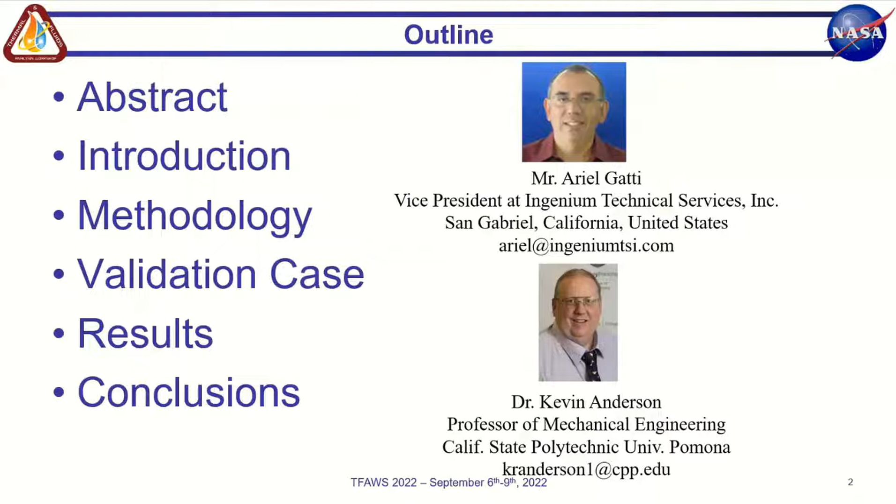So this paper really will talk about the ability to use Excel as a thermal analysis tool. Now, the ETA, Excel Thermal Analyzer, is self-contained within Excel. It's written in Visual Basic as a macro. ETA really takes advantage of mature spacecraft designs, although you could also actually build something from scratch if you wanted to. But it quickly gives you an answer to your thermal network in a matter of minutes, typically.

So this paper will present the methodology used. This particular tool has been validated. It was written, I dare say, about 20 years ago, and it's been used extensively in those 2 decades. The nice thing about this particular tool is that you can easily do a 1, 2, 3 noder problem, or you can basically do a problem that has thousands of nodes and tens of thousands of conductors. The only limit that it has is the number of rows in Excel. And last time I checked, you can get like 1 million rows. So you can have that many nodes and conductors. So that's the beauty of it.

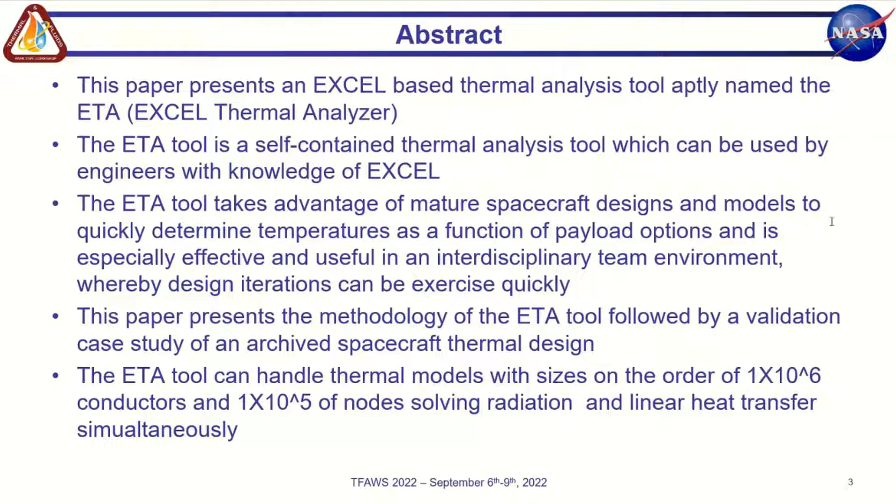Thermal Excel is not meant to compete with Thermal Desktop or ESATAN or any of the major providers. That is not its task. Its task is to give the thermal engineer the ability to do quick and dirty calculations. This is the thermal interface, and it's very simple. You provide a node range, a conductor range, and a heat, and you're able to do steady state, and it gives the thermal engineer the ability to do things that thermal engineers usually need to do. You can look at a heat map, QMAP. You can prune certain conductors by providing a node factor. So if you want to kill a conductor, you can kill it. So you can do many things that thermal engineers can do, and you can do that all within Excel.

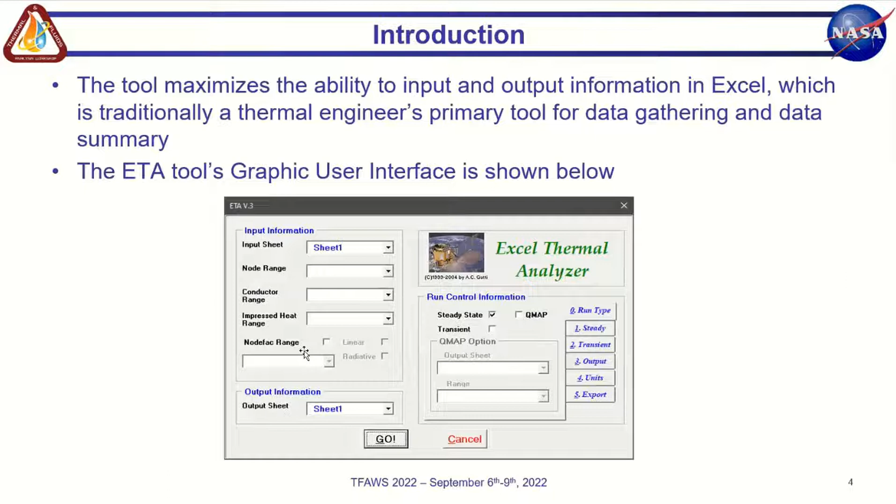So the methodology is based on a fundamental paper that was written by Ishimoto and Fink in 1971. They were with TRW, which is now Northrop Grumman, but it was sponsored by NASA. So the methodology has been around for quite a while, and it just basically follows a steady state heat balance equation for all the nodes, and it's very simplistic. The equation is given there, and the ETA tool basically iterates in a steady state both to a temperature criteria and a heat balance criteria. So, we don't want to violate the first law of thermodynamics.

So it does the very basic things that any tool will do, whether you're using a high-end tool like Thermal Desktop or ESATAN, or as we just saw earlier, Maya heat transfer technologies. Those are the high-end tools. This little tool provides the same level of accuracy as the higher end tools. However, it's not able to do the things that those higher end tools can do.

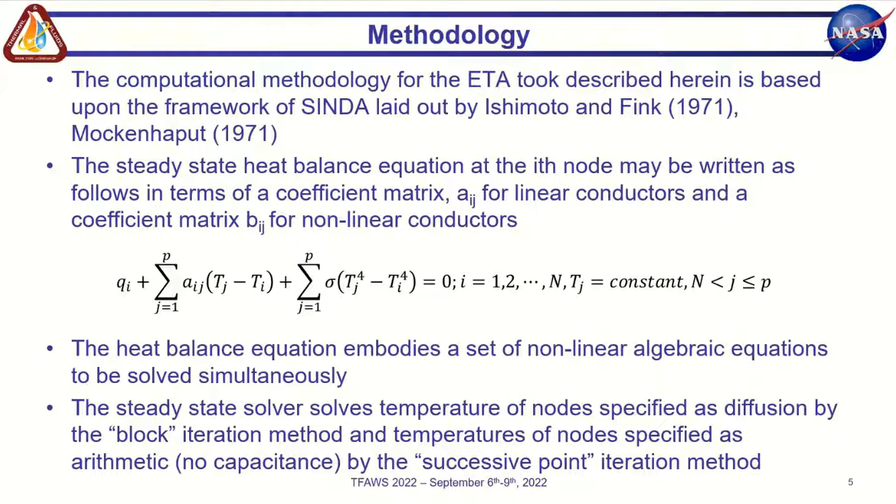There we go. At the heart of the tool, we use the pseudo compute sequence, or in the case of ETA, the long pseudo compute sequence, or LPCS. SINDA, for example, uses the same methodology, and it just identifies the position value of all off-diagonal elements, and basically it optimizes the matrix. So the same methodology is used at least in SINDA with an S, and actually CINDA with a C for those old guys out there. It's the same methodology. I'm not exactly sure what ESATAN or Maya will use, but SINDA will use LPCS, and that's the heart of the analyzer, both for SINDA and for ETA.

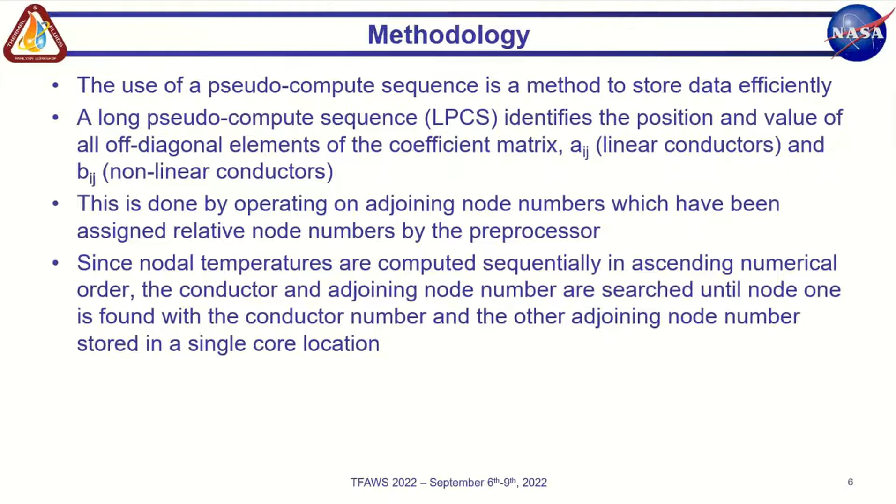Diffusion nodes, and very much like arithmetic nodes, it's the same. This is the equation that we're solving. So basically, the set of differential equations are solved numerically, and they basically result in this equation. So having a temperature, we will calculate the temperature for the next iteration, and so forth, until the change in temperatures meets a certain error criteria. And then we also check for the energy balance. So stability in temperature and stability in heat.

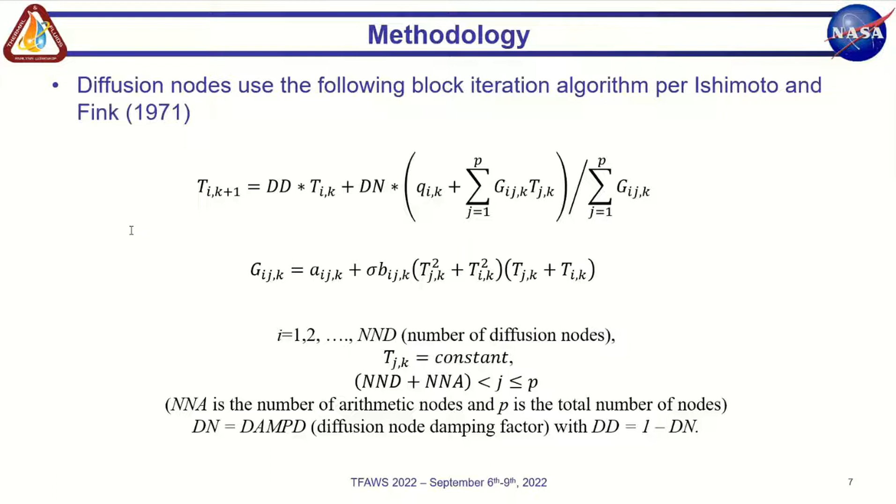And a similar thing is done for arithmetic nodes. Now, the issue with arithmetic nodes is the fact that they have no mass. So it makes it interesting to do a transient solution. But there is a solution. So they're treated in a similar fashion as they are diffuse.

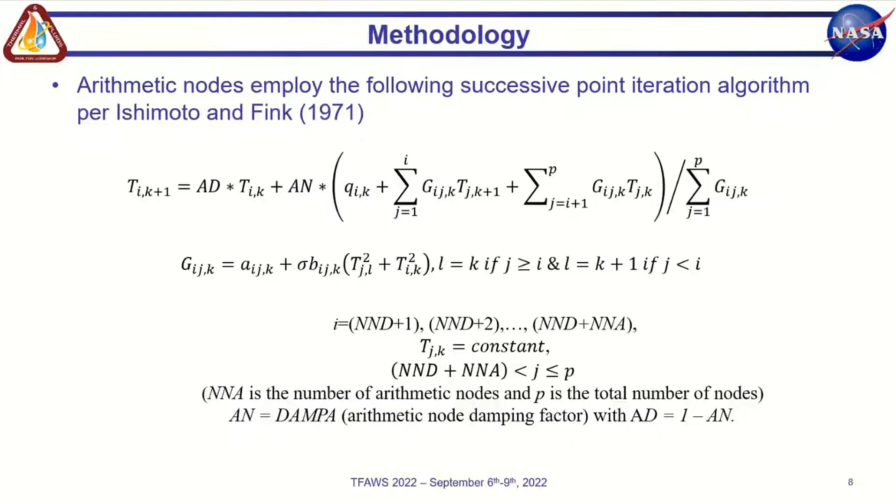And they are defined in a manner that most thermal engineers are used to. You have a node number, initial temperature, and a capacitance. So that's your node block. Then you move into the conductor sequence, and we can do linear and radiation in any form or variation of them. It can be an all linear network, could be an all radiation network, or it could be any combination thereof. And the way that it's defined is the way the thermal engineers are mostly used to.

So conductor number, and if it's negative, it's a radiation. If it's positive, it's a linear. Node 1, node 2, and the conductance between node 1 and node 2. So basically the node and conductor blocks are very similar to what thermal engineers are used to when they do their analysis. And for heating, it's very straightforward. It's the node and the heat that's in that node. And then we just let it rip. The iterations are carried until the criteria is met.

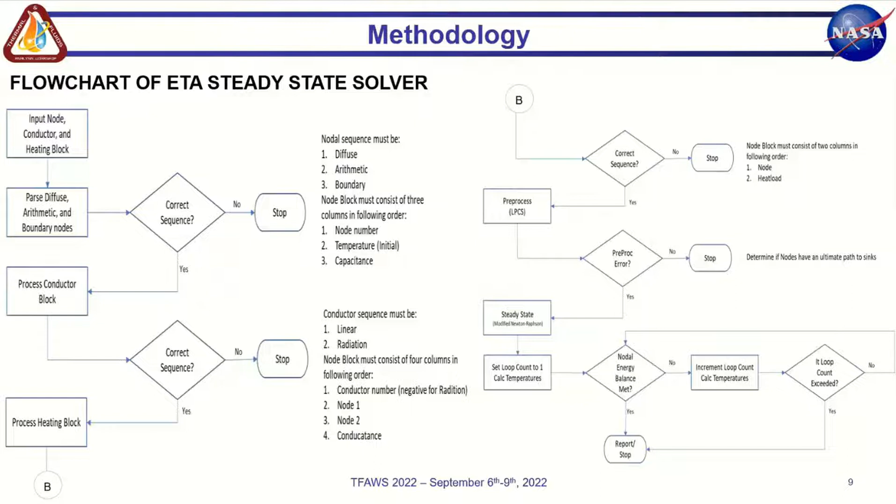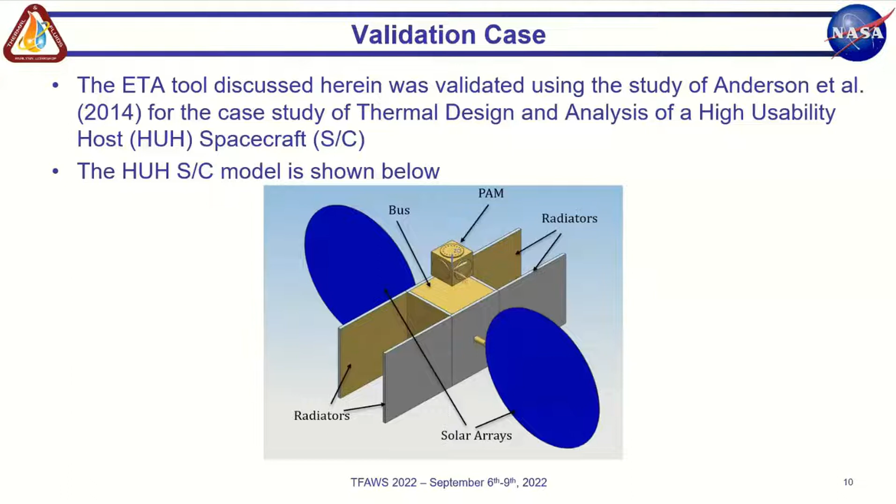So the spacecraft had to have a payload accommodation. So all the science components, and they had their operating temperature limits. We can take that into account within Excel. And it was proposed, the work was to design a thermal subsystem for flight using a combination of bus and payload. So the actual spacecraft had an ACS, or attitude control subsystem, power, data handling, telecommunications. So all those components that usually are part of a typical spacecraft system could be included here. And roughly the dimensions are given of what the system was like.

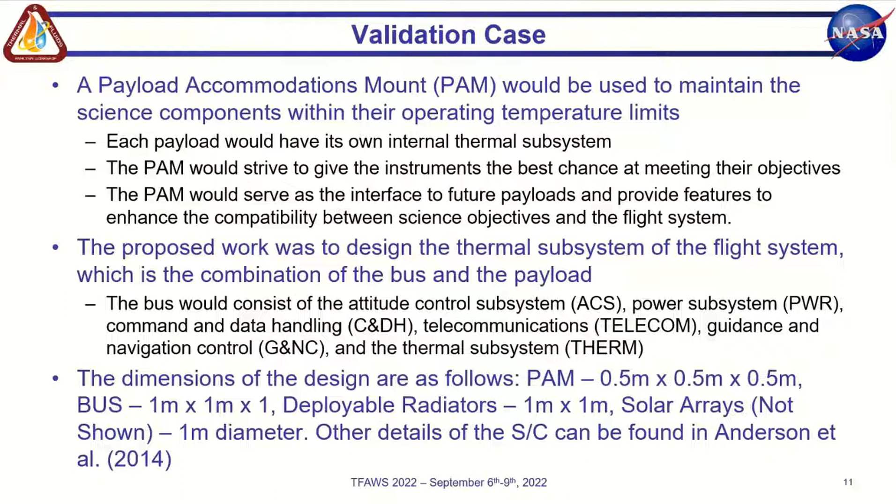So let's get down to the nuts and bolts. So basically, node and conductors, and you can see the simplistic thermal network. Now, this is simplistic. I've actually worked with much bigger spacecraft systems that were thousands of nodes with tens of thousands of conductors, much more detailed, that were used for analysis and production of spacecraft. But this is a very simplistic validation that was done by Dr. Kevin Anderson.

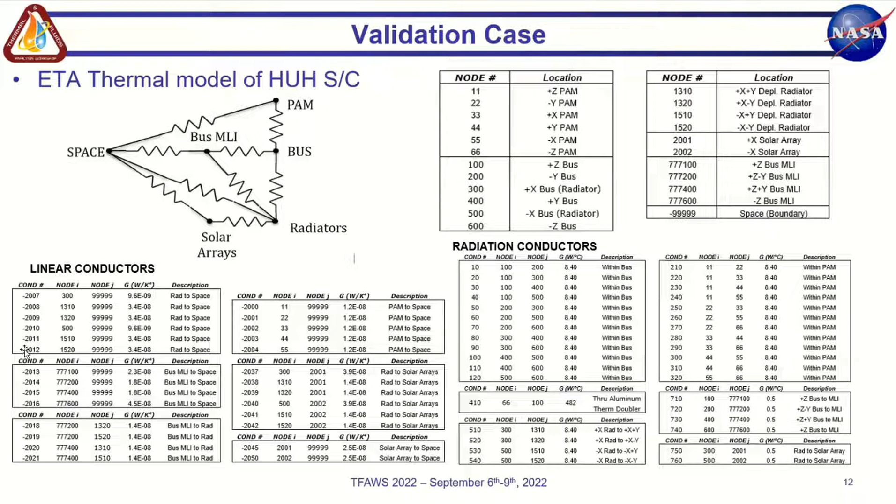So as you can see, the linear conductors are defined in Excel in this manner: conductor number, node to node, and the actual conductor. Negative, it tells me that it's a radiation. And for linear, I can see them here under radiation conductors. Although the chart here has them flipped, so I apologize for that. The linear conductors are flagged as radiation conductors and vice versa. So very simple, straightforward to define a network. And you can do that within Excel by putting a value in a cell. Okay.

Now, one of the shortcomings, to be sure, in this particular implementation of a thermal analyzer is that it does not calculate environmental loading, does not calculate radiative couplings. It's not meant to. You already have tools that do that for you. This tool is meant as back of the envelope calculations. And sometimes those back of the envelope calculations can be pretty involved. And this gives you the ability to solve them.

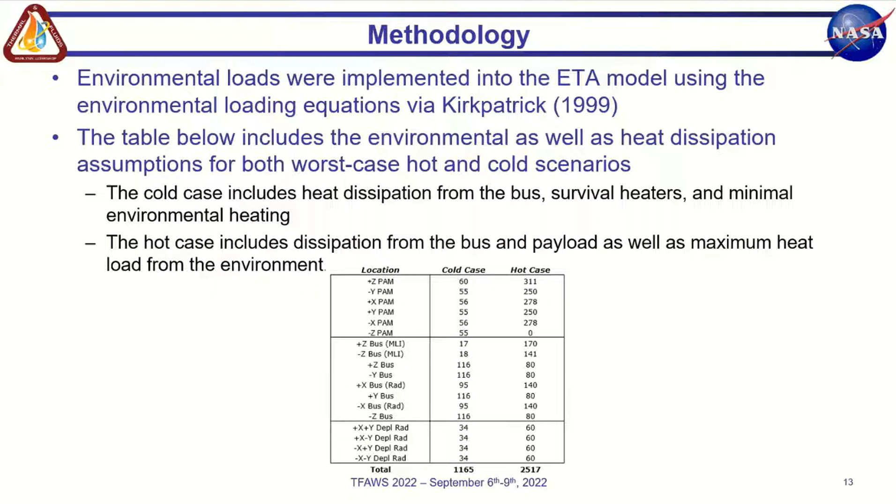Okay, so these are the resultant temperatures, for the cold case and the hot case. So this was something that was verified by Dr. Anderson. So self-explanatory, really. It's just a validation case.

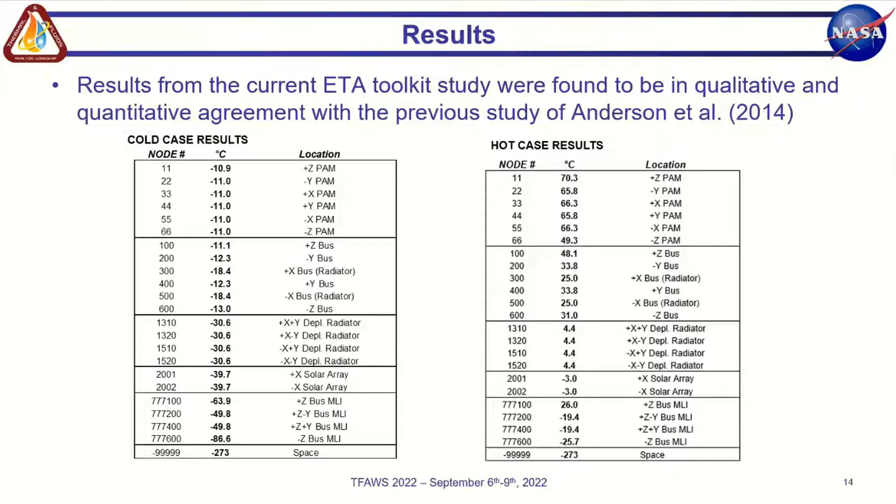So the ETA tool really has proven to be really useful as a thermal analyzer. Like I said, I've used it from small problems, 2, 3, 4 noders, really quickly put them together to validate something from a bigger model, or just to, when a thermal engineer gives me a number, I can quickly validate that the number I was given makes sense.

And I can use it to actually design things. I've actually used ETA to design test fixtures, test concepts, or flight concepts, or what have you. Also, one of the basic requirements to have a versatile thermal analyzer is that it should be able to handle conduction, convection, and radiation all at once. And this tool can do that.

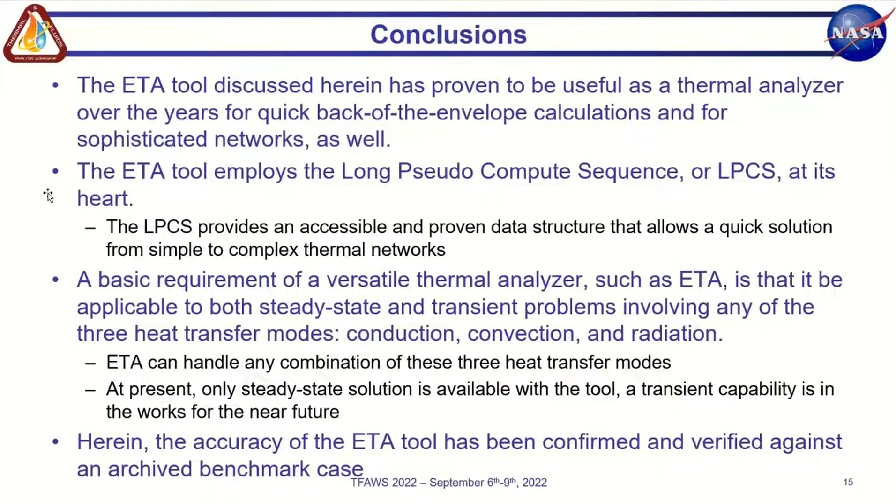And this tool has been verified independently, not only by myself and Dr. Anderson, but by others, using sample problems and so forth. And this is pretty much the references.

So, in conclusion, the tool is meant to be a wrench, if you will, in the thermal engineer's toolbox. I know that the thermal engineer has access to much more sophisticated tools. This is just something they can have in his machine at a fingertip, day and night, to do quick and dirty analysis, or even a little bit more complicated, but basically something that's easy and quick to do.

So if you have any questions, I'll be more than happy to entertain. I have one of my own. This is a tool that I could see being very useful throughout the development cycle for a lot of hypothetical short studies, and especially useful at the start when you're really thinking conceptual design. Do you have kind of some insight into where you see in a development cycle switching from this to a more complex tool like Thermal Desktop or an alternative?

Yes, yes. As a matter of fact, I've used this tool on several occasions where you're trying to develop a concept for a spacecraft of any type, and you have various disciplines. You have the power guys, you have the RF guys, and they all have requirements. So I've been in situations where we lock ourselves into a room and we basically link up our Excels.